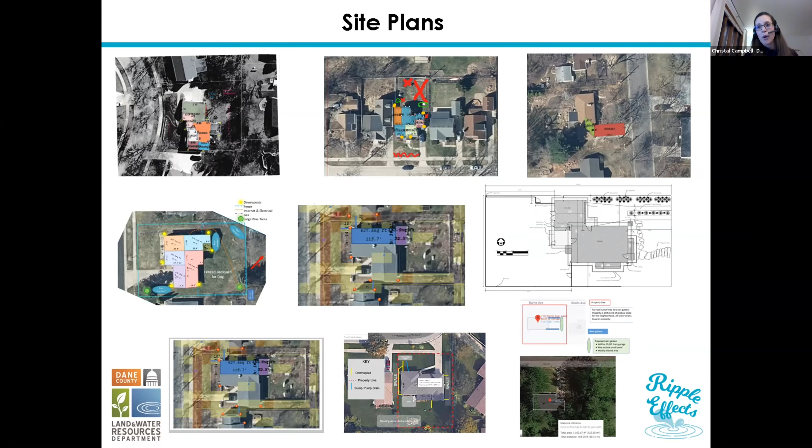Okay. Well, that is all that I have. I am going to pass it on to Theresa now, and she's going to start by going over some of the questions that came up as we were reviewing some of the site plans and some of the questions that were posted on Padlet, so that we can review them with everybody.

All right, thanks, Christal. I will get things kind of situated here so I can see what's going on.

Take your time. It's okay. For those of you that are not doing this, it's really hard with two screens and wanting to see all your faces on one, and then also making sure that you're actually presenting the right information and everything's kind of working. So I was looking to see if I could get the chat up, but I guess you're gonna have to man that one. I will man the chat.

Yep. All right. Well, what I'm going to be mainly talking about tonight is sort of the next step in your rain garden design, and that's the sizing of your rain garden. But first, we're going to talk a little bit about the recap from last week and go over a few things that came up when we were looking at some of the site plans that were submitted. So some of the things that either we want to reiterate or just comment on.

One thing that I did talk about at the last workshop was that you want to make sure that you're not putting your rain garden in an area that receives a lot of drainage from other sites. So we talked about those local neighborhood drainage patterns. A lot of times neighborhoods are designed so that water goes through the backyards or through the side yards. So be mindful of how much water might be getting to your rain garden from other locations other than what you're planning on.

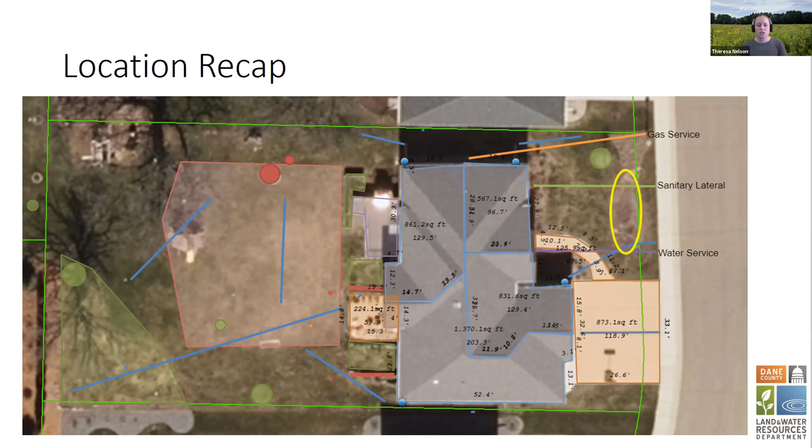So kind of getting back into where we were last time. Like I said, you guys submitted the site plans. We looked at those. This was my site plan, and the location that I had determined for the rain garden was in front here.

And really what we're going to talk about tonight is how big. So we found a location that looks like it's going to work. It's not too close to the house, not too close to trees. We can get water there from a roof or some other impermeable surface. So at this point, it's still a potential location because we do still need to look at a couple things.

And the one main thing is your soils. So that's something we're going to talk about tonight, and then a few other factors that are going to help you determine sort of the size of it. Really, with the numbers we're going to give you, we're shooting for a goal of capturing 90 to 100% of your average annual rainfall.

But really, a lot of this section can boil down to how much space do I have? A lot of times it comes down to that. You might want to make it bigger, but maybe you don't have the space. But what we're going to talk about tonight will give you the calculations so that if you do want to size it for that 90 to 100% capture, you can. So let's get into things.

So the factors that we're going to talk about tonight, I already mentioned soils and your soil properties. The drainage area that's draining to it, and that was something that you guys looked at last workshop with measuring your roof area. And then some of it comes down to level of effort. How much digging do you really want to do? That's also a very important thing.

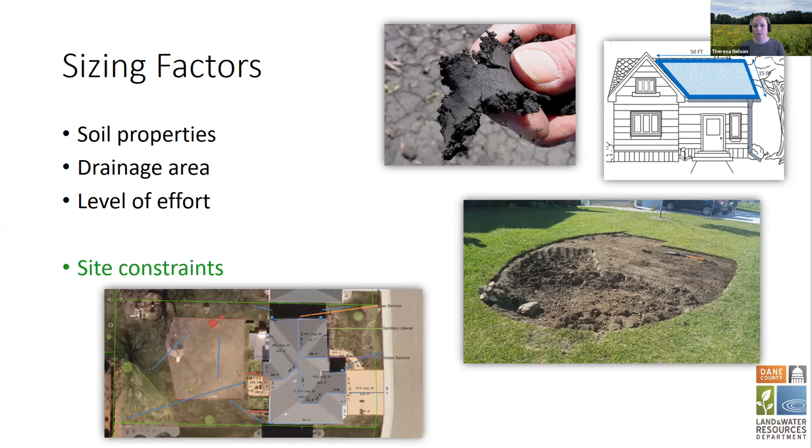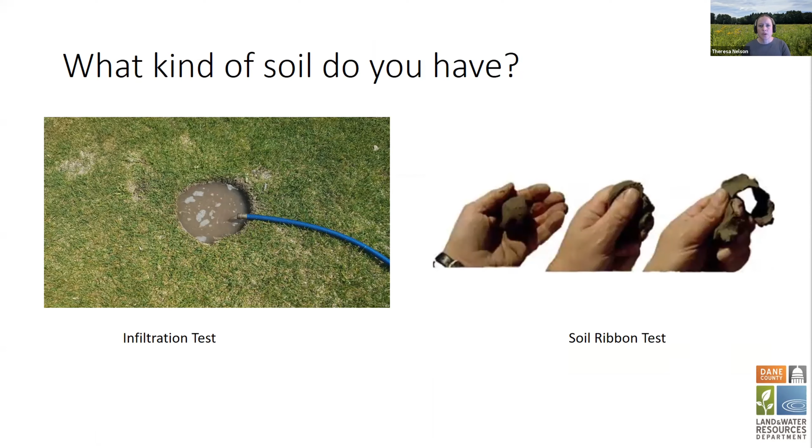So we're going to look at a couple things for determining what kind of soil you have in the area that you're interested in putting your rain garden. One of the things that you can do to figure that out is to do an infiltration test. And the other thing is to do a soil ribbon test. And we're going to talk about how both of those can be done right here.

So with an infiltration test, it really isn't any more than digging a hole in the ground, filling it up with water, and measuring how long it takes that water to drain down through that hole. You're going to want to dig the hole about 6 to 12 inches deep, usually about as wide as your shovel. You're going to fill the hole with water and let it stand for an hour. This just pre-wets the soil and starts getting things moving.

Then you're going to fill the hole with water again, and you're going to measure the depth of the water when you start. So that would be your D1. And then you're going to wait an hour and measure the depth that the water is at after that 1 hour. Subtract your D1 from your D2, and that's going to give you your infiltration rate. So that's the number of inches that infiltrated in 1 hour.

Pretty straightforward. This is going to give you a little bit of an overestimation of your infiltration rate in that not only can the water move down through the soil, but it can also move to the side. And when you dig your rain garden, you don't have as much side as you have down. So this test gives you an overestimation, but it is useful, and we'll show you how you use it for sizing in a little bit.

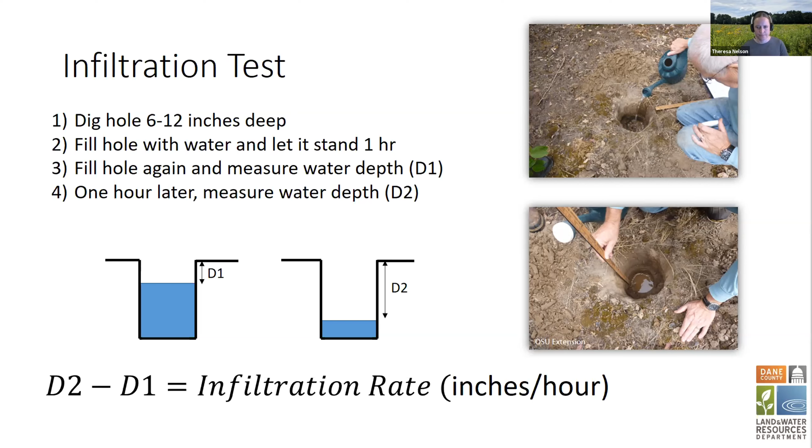So the next thing you can do to look at what kind of soils you have in your yard is called a soil ribbon test.

And if we were in the same room, I like to bring some modeling clay that my kids play with sometimes, though not so much anymore. They're getting a little old for playing with that. It's nice to be able to demonstrate it, but I do have some pictures here.

So what you're going to do is collect a handful of soil from about 4 to 6 inches beneath your soil surface. You don't want to take it from right up on top, because that tends to be your topsoil layer, and that's most likely what you're going to be digging out when you create your rain garden.

So you want to get beneath that top layer. And then you're going to add some water to it until it feels like putty, not sopping wet. You can squeeze it, and if a little bit of water comes out, that's all right, but you want to get it kind of wet.

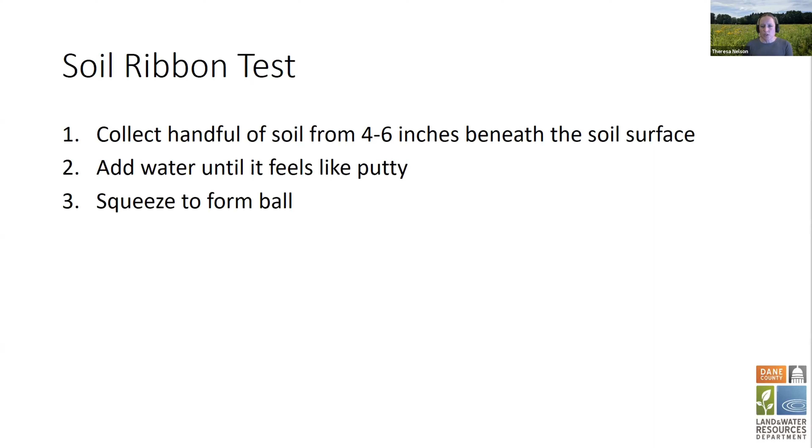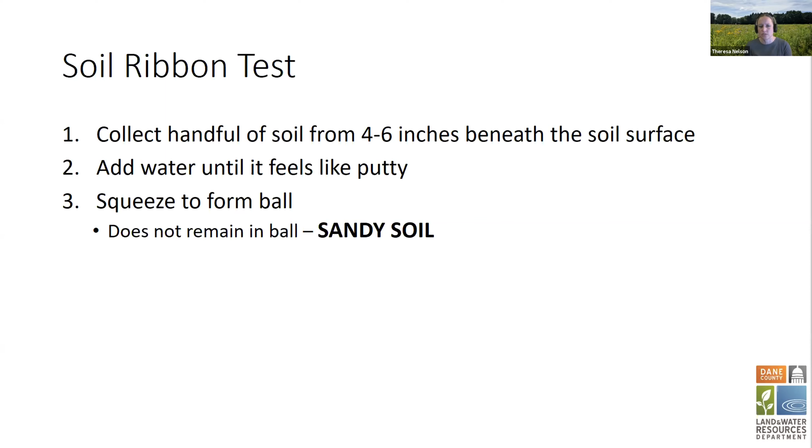Then you're going to squeeze it into a ball, and then let it go in your hand. And if it doesn't remain in a ball, then you probably have a sandy soil. You can give it a little toss. If it comes back into your hand and it just goes everywhere, it's probably pretty sandy.

If it does remain in a ball in your hand, then you want to start pushing out that soil between your thumb and your finger into a ribbon, as you can see in this picture, until it breaks off. And you might want to do this a couple times just to see how long it goes until it breaks.

So if that ribbon is really only about 1 inch long, you probably have more silty soil. If it's 1 to 2 inches long before it breaks, you probably have a clayey soil. If it's greater than 2 inches, you have a very clayey soil, and it might not be a really great place for a rain garden, because if you have that much clay in your soil, it's not going to infiltrate very easily. It's going to take a long time for that water to move through that soil.

And the reason that we do rain gardens is to get water to move into the soil. So if it's really, really clay, you might want to see if there's another spot in your yard that might work, or just do some native planting. That would also be a good option.

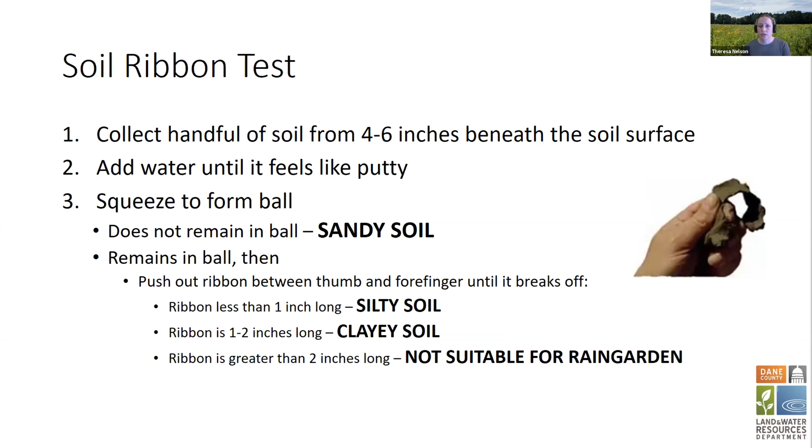So the next thing we want to look at is how much area is draining to your rain garden. And this is something that Crystal demonstrated during the last workshop, ways that you can measure that using some of the online tools. If those don't really work out for you, you can always go outside with a tape measure and measure along the ground where your roof is and get the measurements that way as well. So in my case, I was looking at about 900 square feet, that portion of my roof that was draining to the downspout that went to the area where I wanted to put the rain garden.

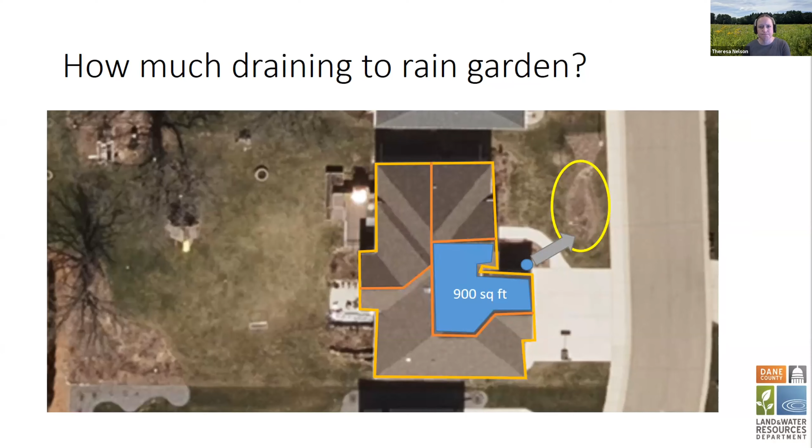We're going to use that area along with our soil information. And then the other thing that we want to look at is this level of effort. How much digging do you want to do? And it's related to the slope of your yard. We talked a little bit about the slope during the last workshop. One of the layers on the DCiMap mapping tool has slope. It's not super detailed, but it gives you an idea of what that is, and we'll talk about some other ways you can look at slope.

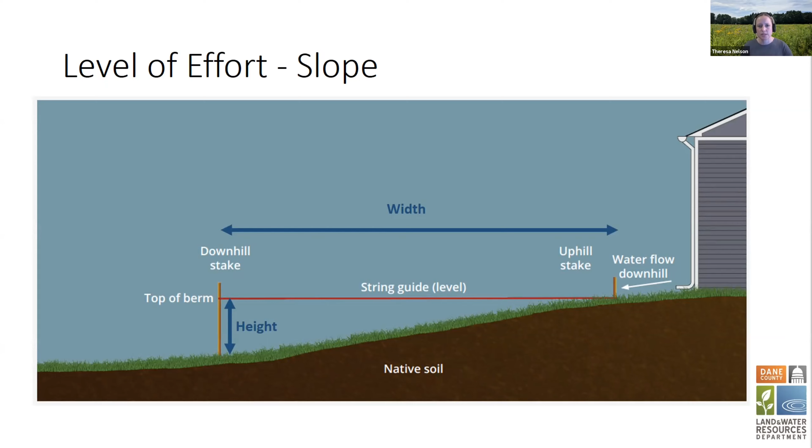Basically the slope is going to give you an idea of how deep you want to make that rain garden. The steeper the slope, the easier it's going to be to have a deeper rain garden, whereas if you have a really shallow slope, you might not want a really deep rain garden because you're going to have your soil out of balance. So you need to dig to get a flat bottom, and then you need to pile to get a berm. And I'll give you some examples of what that looks like based on the slope. Sometimes it's not super easy to understand just by explanation.

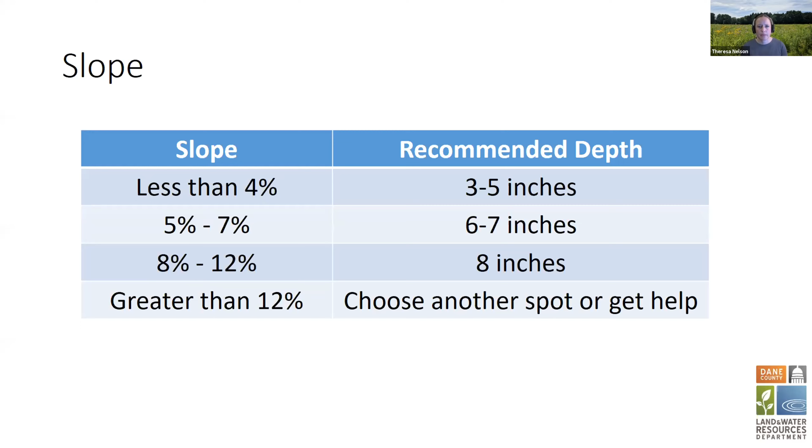Another way you can do that is, the rain garden manual shows how you can use a line level out in your yard. If the snow is melted yet, you could go out and do that, or wait until the snow melts, and you could measure it out actually on your yard too. That's going to be probably your most accurate measurement. But these are guidelines. So if you don't get something exact, it's not a big deal. Oh yeah, 8%. Oh yes, this is the image from the rain garden manual that tells you how to do the measurement in your yard.

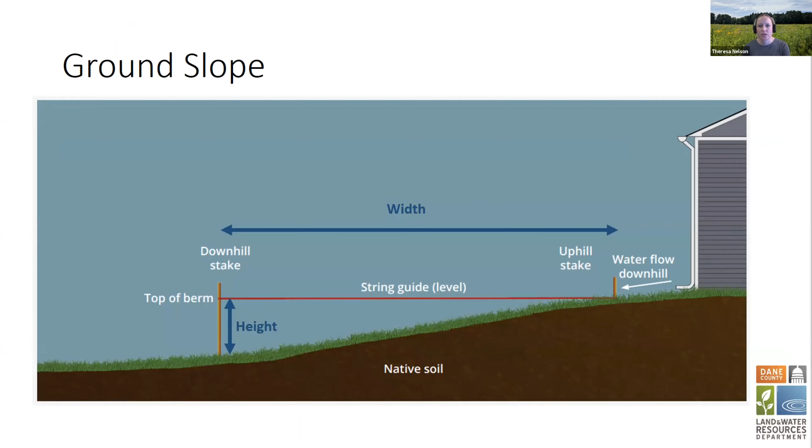So we've looked at soils, we've looked at how much area is draining to our rain garden, and we kind of thought about how deep we want it. Now we look at what size, and the things that are going to determine the size based on a percentage of the area that's draining to it. It comes down to mostly your soil type. So if you have a sandy soil and you have at least 1 inch per hour infiltration rate, then your sizing factor is going to be 10%. So 10% of your roof area you'll want to have as the area of the bottom of your rain garden.

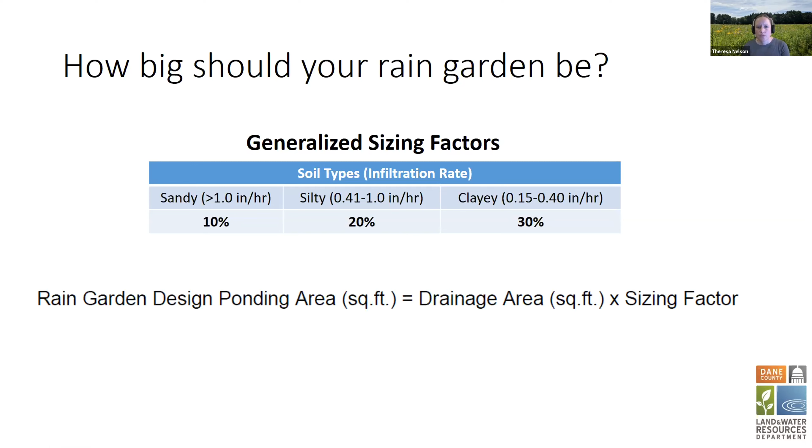If you have a silty soil and you have infiltration rates of at least 0.4 to 1, then you'll be looking at 20%. And if you have a clayey soil and infiltration rates probably less than ½ inch per hour, then you'll be looking at 30%. So we use that sizing factor with our drainage area in order to get the design area for the bottom of your rain garden. One way to think about that: with sandy soils, you can get away with a smaller rain garden than if you had a clayey soil.

So if we had this area, the roof draining to the rain garden, if we had sandy soil, this area is 10% of the yellow area. If we had silty soil, we'd have 20% of the yellow area. And if we had clay soil, we'd have our rain garden bottom be about 30% of the size of our roof draining to it. So we'll just walk through an example calculation here.

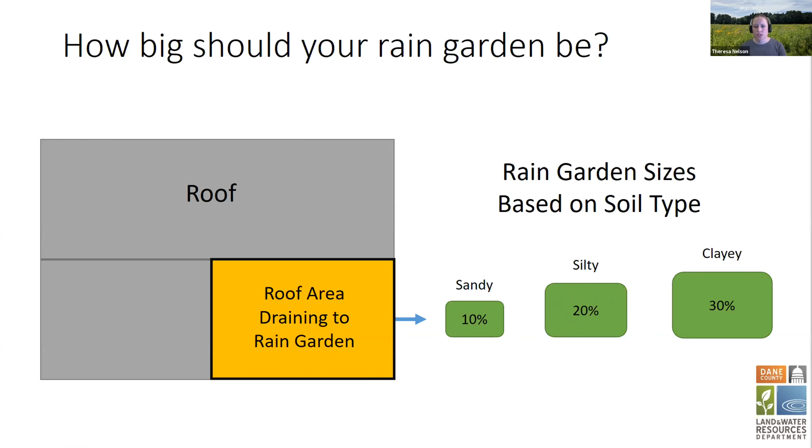For mine, we had a drainage area of 900 square feet, and I had a silty soil type. My sizing factor then was 20%, or for multiplying, we're going to use 0.2. So 900 times 0.2 equals 180 square feet. That's going to be the size of the bottom of my rain garden. And I determined that I probably wanted it about 10 feet wide. So what does the length need to be for 180 square feet? 180 divided by 10, the width, gives us a length of 18 feet.

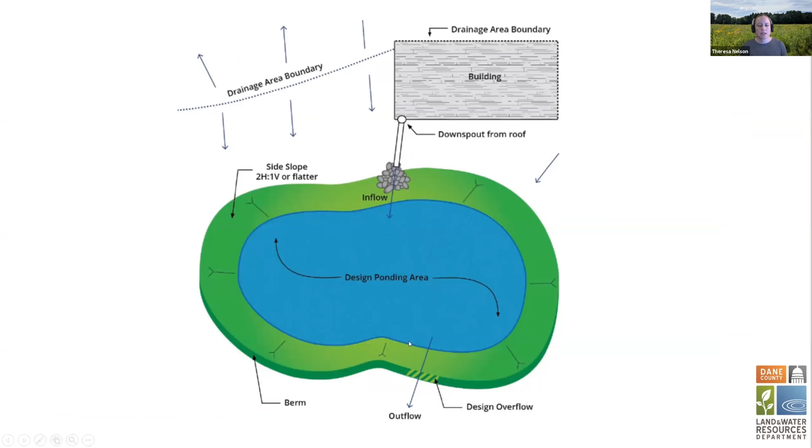So that's going to be the size of my rain garden right here, which you can already see from the aerial photo. That's approximately the size; it might have ended up being a little bit smaller. But some things to think about when you're planning for the size: that's just the size of the bottom of the rain garden. You will have to have room for the transition between your lawn or yard and the bottom of the rain garden. You'll have to dig down, and that's going to take up some space, and also some space for the berm. Transition slope and the berm, yep.

So to wrap things up, it really does come down to a reality check. Do you have a small yard? Do you have a big yard? Do you have a lot of other things going on, a lot of other constraints? How much digging do you want to do? A lot of times you want to make it a certain size, but remember you have to do the work as well. And then you also fill it with plants, so cost can be a consideration as well. Really, do what you can, and it will be good.

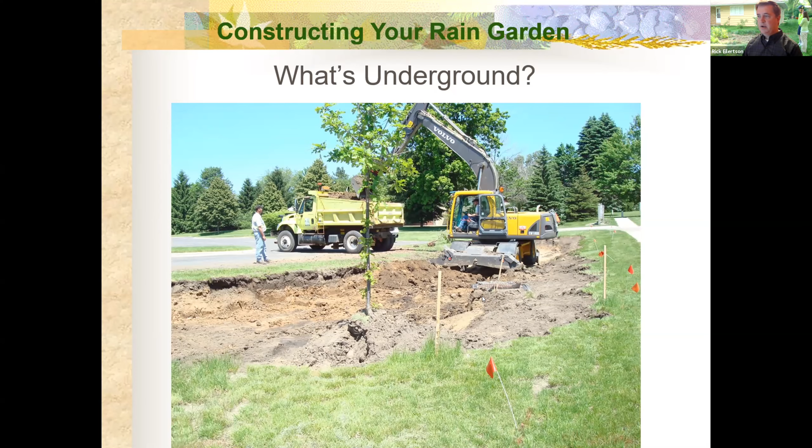But anyway, with the utilities, generally orange is telecommunications, red is typically electric, yellow is typically natural gas. So there's a couple of different things to keep in mind, but you want to make sure, probably even before you start laying out your rain garden, you understand any utilities. On private residential properties, you also might have things like invisible fences. Typically a utility is not going to locate that when you call 811. Hopefully you'd know where that is. If it was put in by a previous property owner, or you just didn't remember that you installed it, it's a pretty easy fix if you wanted to keep it, or you just put another one in.

So we're talking about what's underground now, and that's understanding the soils. You can do this even if you're not putting in a rain garden: I'd recommend getting a soil probe. You can pick these up at local UW Extension offices. Crystal did mention that right now, because of the pandemic, the Dane County UW Extension office doesn't have staff to make these available, but hopefully soon they will. And you can also check the local hardware stores and try to come up with something.

But basically, this is Evan pushing the soil probe into the ground, and then you pull that out and just take a look at what the soils are. Actually, we were aerating our lawn with the soil probe that we got for free. But then you can take the soil samples too. For example, if you're trying to understand what soil types your lawn is, you can have those taken to the UW lab and get a soil analysis done.

So continuing on with what's underground, and Theresa already talked about this pretty well, I'll just elaborate a little bit more. That roll test or the ribbon test: you look at this, and this is probably at least 5 inches that the roll test has gotten without breaking. So that means that you're basically in this 2-inch plus clay. These are slightly different infiltration rates than Theresa had, but the same general idea.

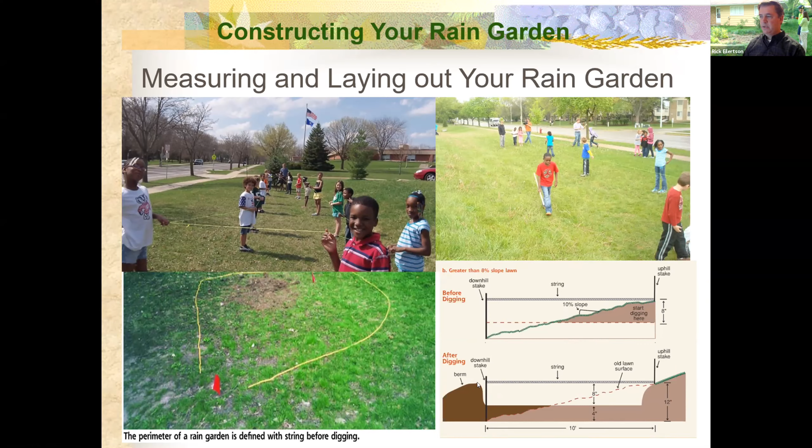Basically, again, using a line level like she's using right here, and then just putting stakes, and you can just tie the string around several stakes. That's what I would probably do. Like here, we've got the stakes at the perimeter, and here I actually had a surveying instrument, and I just measured this, put a crow's foot, basically a line that represented a level line all the way around the perimeter. Here I wanted the height of the berm to be 8 inches above the release, and I had the release about 6 inches above the bottom.

So there's rarely more than like 6 inches of standing water in this community center rain garden. Again, this is what the line level looks like. This is actually one of the earlier rain gardens.

This is Roger Bannerman's front yard rain garden. I don't know the exact date, but it was in the late 90s or early 2000s that Roger put this one in. And again, we're obviously dedicating this workshop series in Roger's name. Roger passed away this past fall.

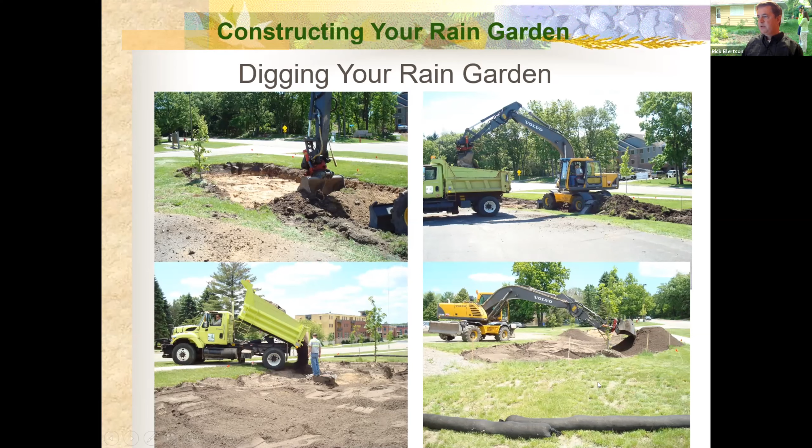We also had Silt Sock of Southern Wisconsin donate silt sock just for perimeter erosion control, and it had an interesting application later on that I'll talk about in a couple of other slides. Getting plants for the rain garden, I call this the stone soup approach. So basically put the word out that we were doing this project. Obviously we had some funding from city staff, and the AmeriCorps volunteers donated a lot of their time and labor, helping me lay out and design the rain garden.

And then folks like Roger got back to me. This is Adrian actually digging in that front rain garden. So this is 2009, and by that time, Roger was interested in changing the plants that he had in the rain garden. So this contractor was going to just either dig these out or just spray them and then till them under. But Roger actually let us dig them out and then use them in the Fitchburg Community Rain Garden, which was a really cool project.

This is one of my coworkers, Holly, who's actually on the call today, that was learning from Roger. Roger loved to talk and teach. And anytime he had a willing listener, he would talk for hours. All my 5-minute conversations with Roger typically took an hour or so.

One of the cool things about the Leopold Rain Garden project was we actually started with the kids, gave them bags, and then took them through the Promega bioswale just down from City Hall in Fitchburg. We had them form into groups and then told them which plant species we wanted them to gather seed from. So for the Leopold School project, we actually did the rain garden design from the beginning. And then the kids actually stratified the seeds, sorted the seeds, and then planted them, and those are the plants that they put in. This is Brittany planting in the Fitchburg Community Rain Garden.

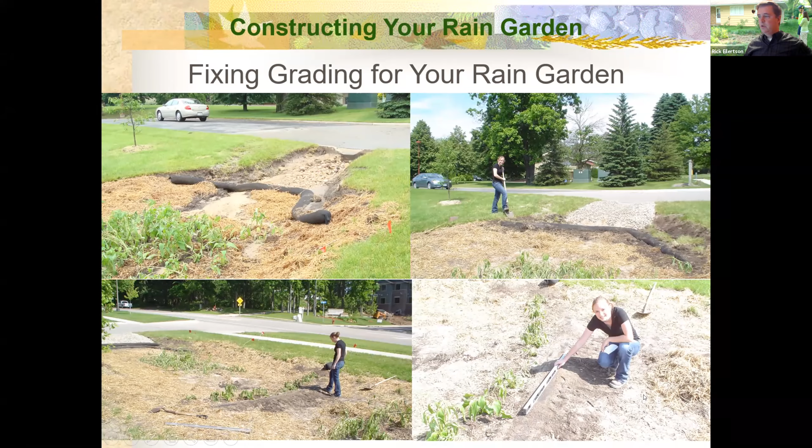Another project that I was involved with, we had plants left over. There were so many plants that we were able to gather from Roger's rain garden. A number of those are in Baraboo. I live in Baraboo, and I'm on the Kiwanis, and the city actually made a bioretention device. So it's a large bioretention device. You can't see it real well, but there's an end wall.

So the initial flush sends water to a rain garden, and then there's an underground pipe, an underdrain with sand around it, that allows that water, after it gets filtered, to go back into the storm system. So it's kind of a first flush. They needed plants, so we had a planting party with the Kiwanis, and this is the rain garden in action after a good heavy rainfall. The volunteers, and then my older son, who was more interested in baseball than rain gardens at the time, but it's kind of fun anyway.

How am I doing on time, Crystal? You're about 5 minutes over, so we should probably wrap this up in a couple of minutes.

Thanks. So another site, I'll just blitz through quickly: the Fitchburg Recycling drop-off site rain garden is obviously much larger than what you would do on a residential property. We had 6 feet of clay when we dug the test pit, and it ended up being about 10 feet of clay that we dug out in some areas. We filled it with about 4 feet of 3-inch stone, and then 3 feet of 1-inch stone, and then topped it off

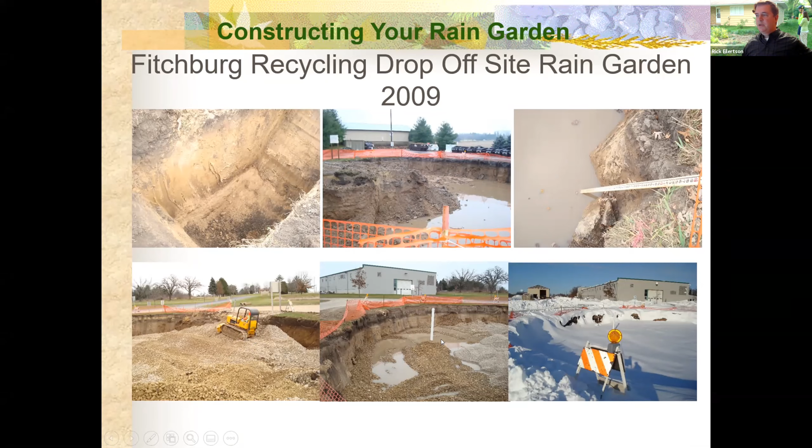with engineered soil. It was really interesting seeing that even with doing all of that, it still held water at different times. After we modified the release structure a little bit to minimize the depth of water, it was functioning much better.

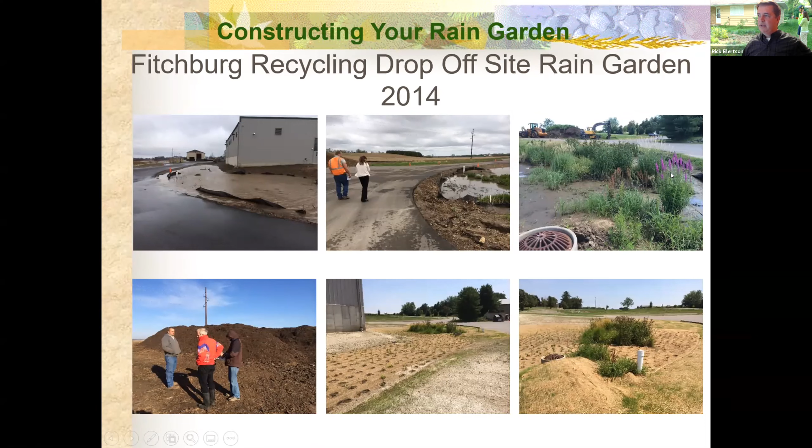I'll talk a little bit about this during the maintenance, because you can see, I don't know if anybody can see this plant right here, but this is purple loosestrife, and it came in. We did not plant that there, but it was something that we ended up needing to deal with.

When the plants all grow in, it looks like it's all level, but there is a chance to fall in, and there's a little bit of a safety hazard. So something to keep in mind if you decide to put a terrace rain garden in, look at that. So that's what I've got.

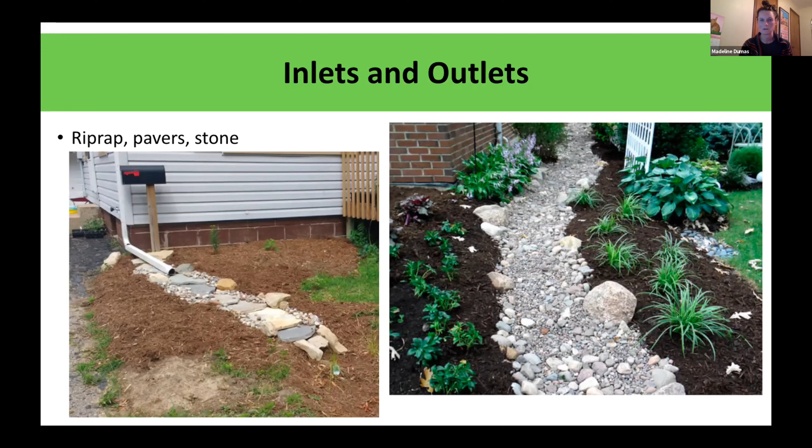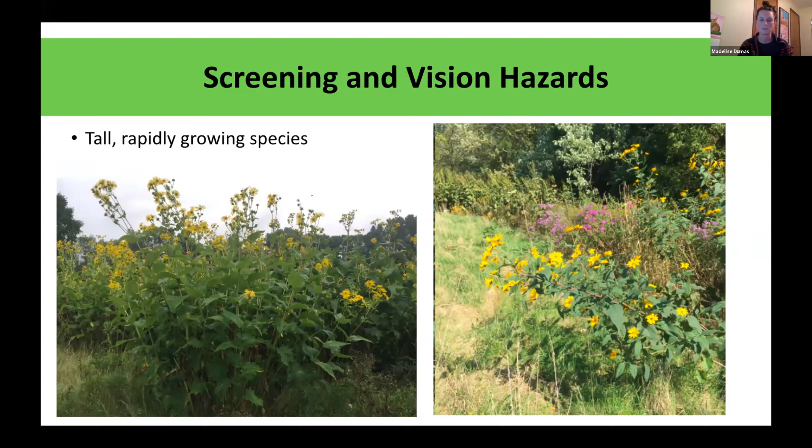But maybe you would like to look out and see your neighbors strolling by, so you don't want something so tall. On the right, we've got a much shorter rain garden, and that's in part because it's in a median. We can't have it too tall, but it also has a nice visual appeal.

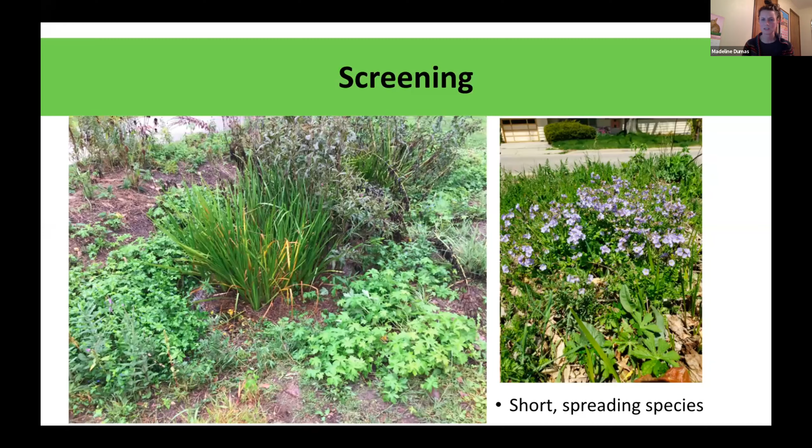Some shorter species, again, we'll get into this more later on, but we've got some on the left here, Canada anemone and some iris. Those aren't going to get too tall, and they're going to kind of fill in and look like a nice ground cover. On the right, we've got some wild petunia, and it's just pretty to look at, and it's not going to obstruct any sight lines.

One thing to consider if you live in the city of Madison, we do have some restrictions for plantings. You can plant kind of whatever you want in the interior of your terrace, but when you get close to the curb, nothing taller than 8 inches. You'll want to think about that in your own yard, close to your driveway.

I know one thing I noticed this winter, and you probably all noticed, is that tons and tons of snow piles up next to your driveway as well. Maybe you don't want all that snow or salt, if you use salt, directly in your rain garden. I know my rain garden is actually fairly close to my driveway, and it does take a fair amount of snow, and it does just fine because I have a lot of really hardy native plants in there. But think about what species you're trying to propagate, and that could be a consideration for where you locate it.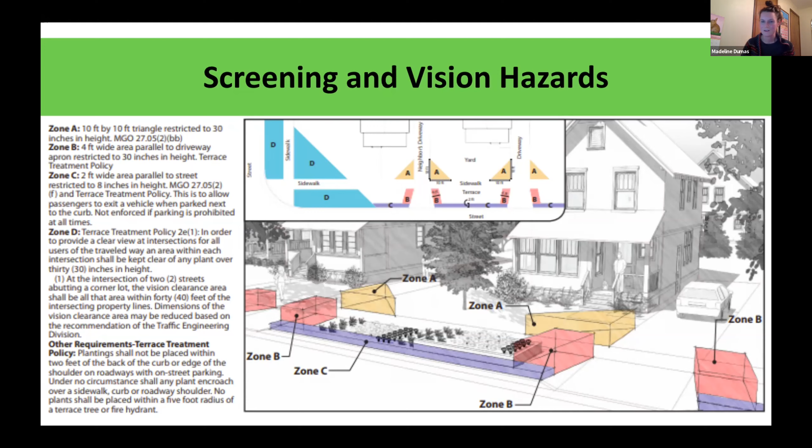Let's see. Vision hazards, of course, if you decide to plant a terrace rain garden. This rain garden is very overgrown. That tree there, that shrub, is actually blocking the street sign. You can't even tell what street you're about to turn onto. So you really want to be careful where you're planting things if you have a corner lot or if you're planting on the terrace, so that you're not blocking anybody's view.

We'll get into this more in the third class when we talk about plants. But something to just think about now as you're starting to lay out your garden is the design of your actual plants. So, what colors do you want? What colors do you want where? Thinking about the phenology, so when things bloom and how you can have color throughout the entire season, whether that's by planting flowers, wildflowers that bloom throughout the season, or grasses that turn red or yellow and beautiful colors in the fall.

Thinking about height arrangement, here's where it really comes into play. You want taller things in the middle, shorter towards the edges. That tends to work out pretty well with a lot of our plants because things that tend to grow taller take up a lot of water, and so they like wetter feet. Things that tend not to grow as tall don't like to have their feet quite so wet, so they would be on the edges anyway. But all things to consider as you're placing your rain garden.

And then wildlife habitat. So about 30% of our native bees actually use hollow stems to lay their eggs in. So you really want to think about what you're planting, whether you're leaving plants. When you're thinking about doing cleanup in the fall, maybe you want to leave some of that litter so that insects can overwinter in it. You can do things to attract insects and birds, of course. You can leave dead wood, logs lying around. Again, that can help attract some of our cavity nesting insects.

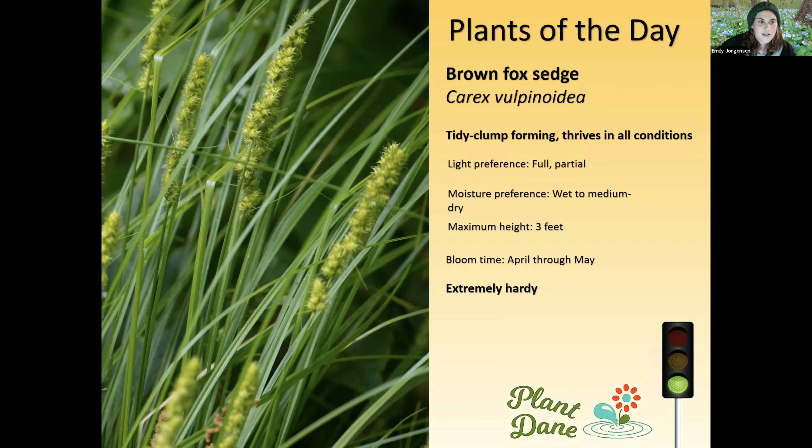Our next plant of the day is a sedge species. So sedges are the genus Carex, and they're kind of a little bit like grasses. And brown fox sedge is probably one of the more common ones you'll see here in this area. And it's a really good one for the basins as it does quite well in standing water. It can tolerate quite a wide range of conditions. And you can see its flowering structure is kind of that cool green clump at the end, and that's going to ripen into a nice cool brown looking thing. So a nice tidy clump forming plant does very well in basins.

Our next plant is a native grass called Virginia wild rye. This is a really good one if you have a shady rain garden because it does really well in those shadier conditions, although it can handle all conditions. It is pretty short-lived, but it readily reseeds. People use it quite often as a cover crop. So if you're looking to fill your rain garden up quite quickly, you can use this one.

And another cool thing about this plant is because it's short-lived, you can kind of manipulate your environment. So if you are seeing too much of this plant, you can cut off the seed heads before they ripen in fall. And on the flip side, if you want to see more Virginia wild rye in your rain garden, you can leave those seed heads over winter and let those seeds fall and germinate.

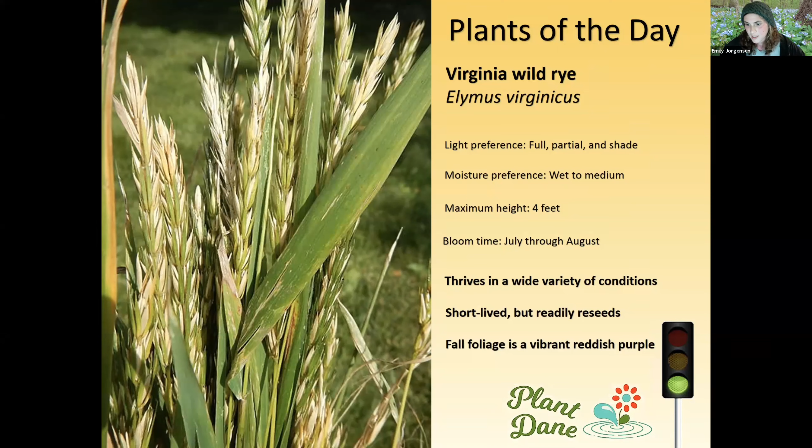And our last plant of the day is Rattlesnake Master, which is probably the coolest native plant name of all time. One thing I really like about this plant is its leaves resemble kind of yucca leaves. It seems like it would belong in the desert Southwest, but historically its leaves were actually used to weave materials out of. So it was actually discovered that there was some footwear that used Rattlesnake Master leaves to weave footwear out of.

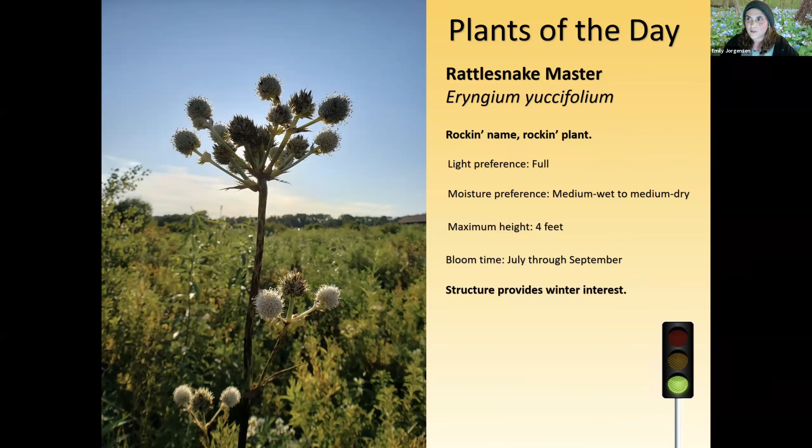So it prefers full sun, and I've seen it grow kind of close to standing water up to drier areas. And it also provides winter interest. You can see that structure is quite unique, and if you leave it up over winter, you're gonna have something really cool that looks like that. So that's actually in Teresa's rain garden as well.

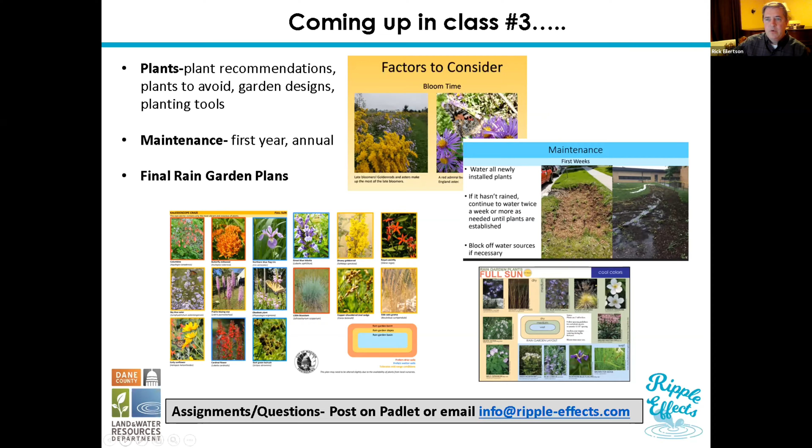Amy had a question about guidance for sizing a rain garden built to accommodate flow from a sump pump. I can answer that in writing too, but a couple of considerations. If there's a sump pump that's running regularly, it might mean that you've just got a really high groundwater table. And so if you're planning to put a rain garden anywhere near your home, that might be a problem. So certainly you can design something like that, but just make sure that you're not adding more water that might be going into the sump pump.

So if you got it far enough away, like 25 to 30 feet or more, it may not be as much of a problem, but still, you got high groundwater, and adding more water to that might not be a great idea.